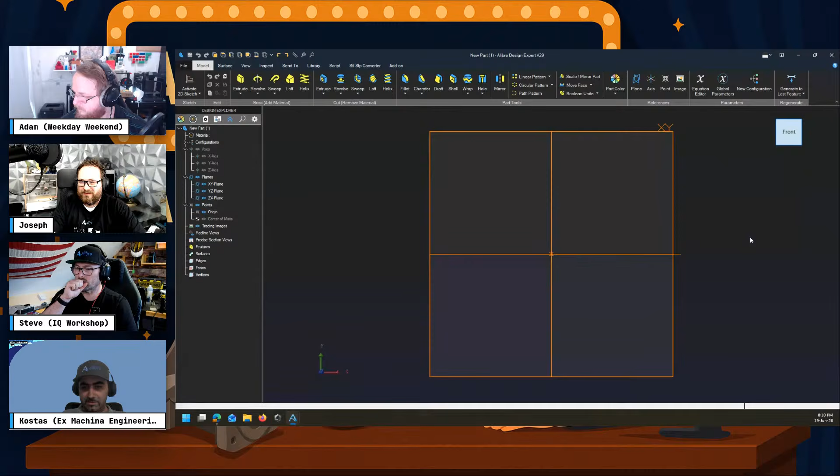But yeah, okay, so let's answer quickly. Yeah, if you need to open up a CSV file into Excel. But if we can switch over to my screen, I can start showing how it works. So what I'll be showing you guys now is the official Excel add-in.

So let's say that we've got a flange here, right, this is the original example. Let's say the outer diameter is 285, and the inner diameter, let's call that 160. These are not real numbers, these are off the top of my head, but you can definitely look up real data and base the design off of that. So this is the flange disk.

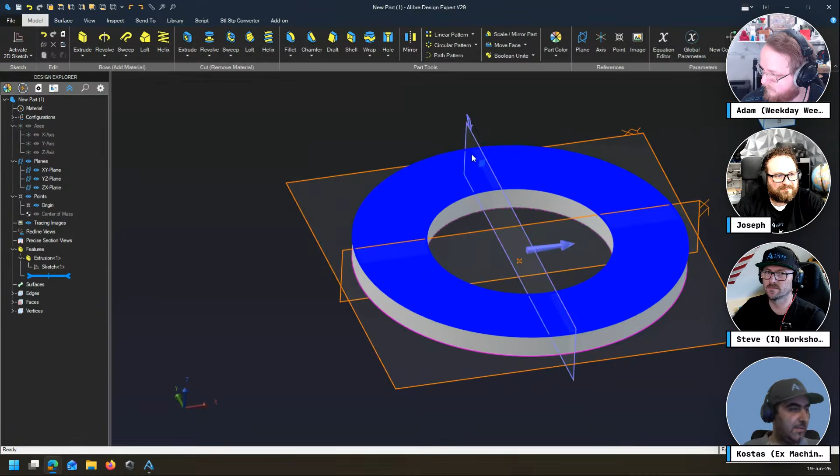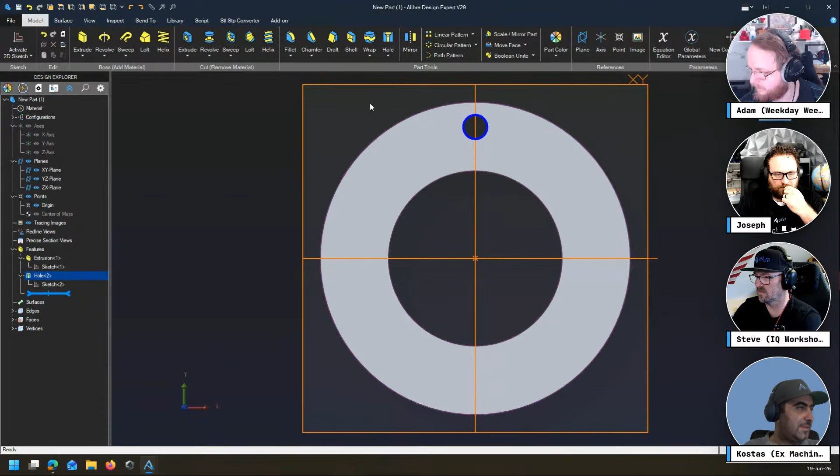Okay, let's go ahead and get a hole going in there. Apologies, I think I have too many presets. First time you open it, it takes a while if you've got a few presets. This is how many I have, by the way. Okay, let's get a radius going here, let's do 120. Is that going to work? Let's see, yeah, that's fine. And I'll pattern this for 8 times.

Okay, so this is a flange, a very basic rudimentary flange. If we go into our equation editor really quickly, you will see that as we're designing, we're creating parameters here. One parameter is a count parameter, number 8, that's the pattern I just did. Then you've got outer diameter, inner diameter, and you can change these names. This is the hole diameter, this is the PCR, circle radius. So this is the flange thickness, this is the hole diameter, this is the radius of the bolt circle.

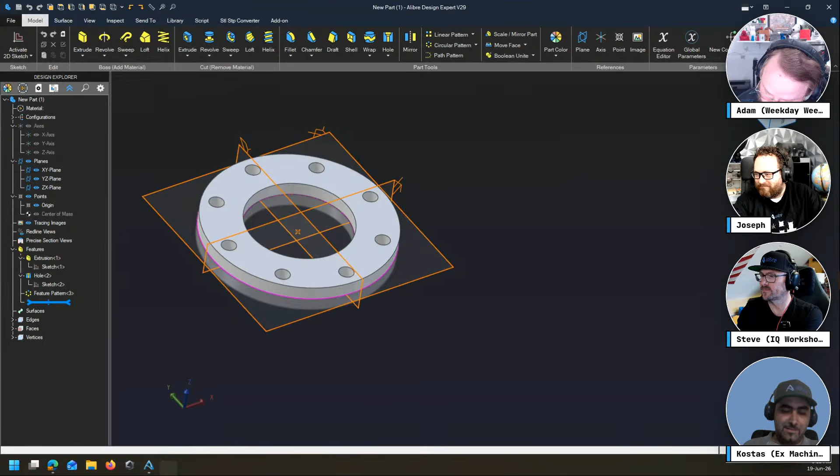So what happens now? Let's just, I need to save this somewhere, I'll do my desktop for now. So what happens now if we fire up Excel? Well, let me do this. There you go. No? Again guys, sorry, technical difficulties, we'll get there.

So what happens here is if you go into add-ins and you need to save this workbook. Okay, let's save this also to my desktop, let's save it to documents, that should work. Yeah, for some reason my Office saves everything into open format first. But anyway, so I guess it knows who the owner is. But as soon as you open up the Alibre Excel add-in, and I show in my video how to install it, it's really easy to get it going.

What you get is this screen, and you have session here, configuration. It can also drive configurations, and this is amazing. If you click here, what you get is this dialog box which shows all of the open files for Alibre that you have going. So you might have part files that are open, you might have an assembly that is open, it'll all show up in here.

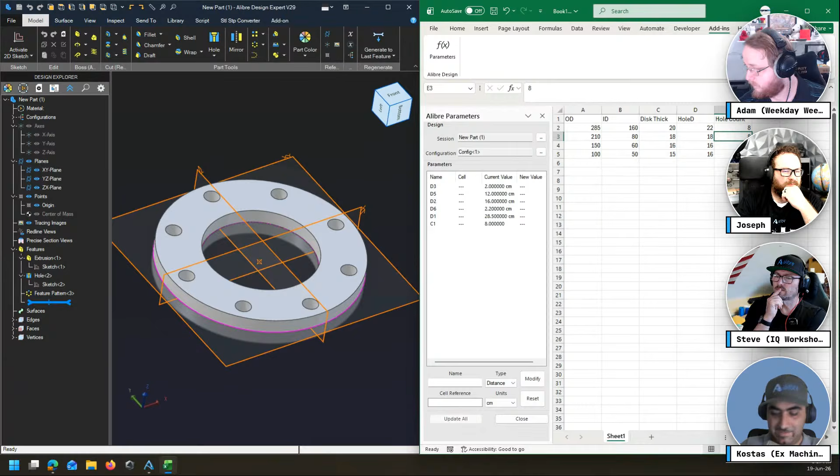Let's still do 16, and, oh, you know what? Let's make this really weird. Okay, let's say that these are the values that we want. This is our table, right? Okay, so this is turning into an Excel tutorial, but bear with me. Let's call this size, and we'll call this A, B, C, and D. So I'm not just showing you how the add-in works. I'm also showing you how to set it up so that it is useful, right?

So we're just going to go here into data and data validation. You go into data validation, you get this dialog, you go list, and you hit this button and you tell it that this is your list, and you hit OK. So what happened? You just made a drop-down menu here. It says A, B, C, and whatever, right?

And now we're going to go and do a quick lookup. This is our lookup value. Comma. This is our table array. And this is going to be column 2. And we're going for exact matches. And that should work. And you see that we got our value here, right? We need to hit F4, so we lock all of these cells into place.

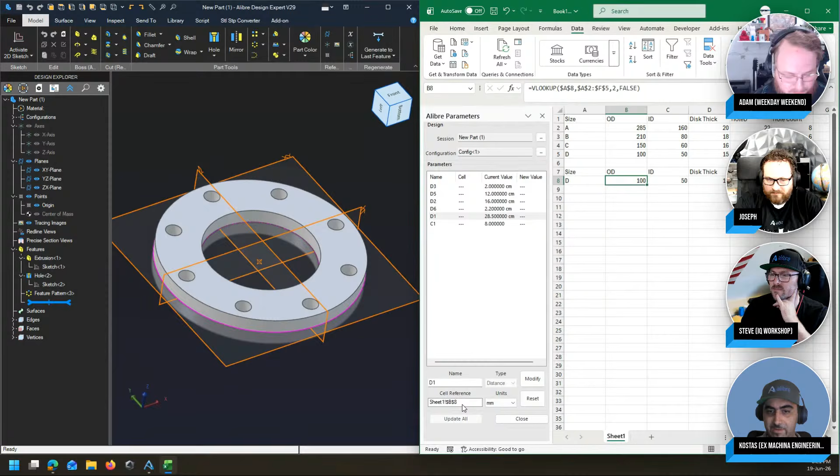Advanced CAD CAM Solutions just said you need to... it's in centimeters, not millimeters. Oh yeah, I was going to highlight it. It's not letting me highlight comments, but yeah. So you have your units down here, right? And you tell it that this cell reference that I just gave you is in millimeters. It just needs to know that, even though it operates in centimeters as it brings it in.

And after I select these two things, I just click modify. So what just happened? First of all, this became millimeters. Okay, that's easy to see. And now there's a cell reference, and the current value is 100 millimeters. We have a column here that says new value, which is blank at the moment. So let's go through real quick and do all of these.

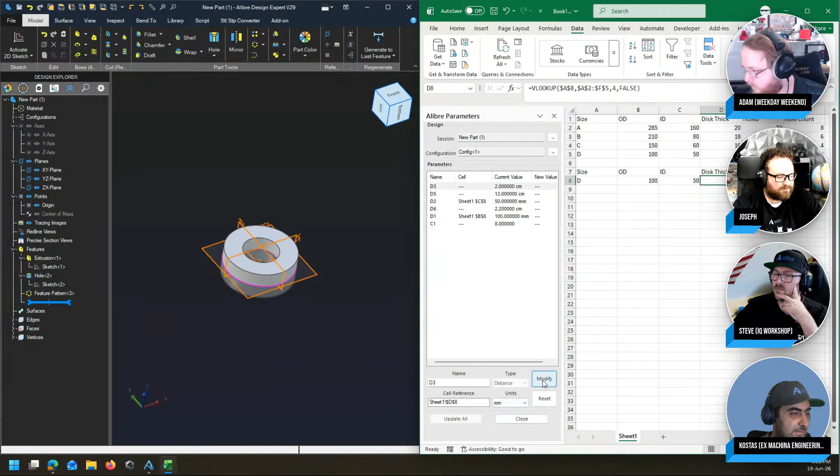It's not going to take a huge amount of time. So this is the disk thickness, and again, it is in millimeters. As you modify things, you still have an overview from this table, just to make sure that you're doing everything correctly. So this, see now we missed. Okay, so I'm just going to insert a column here. Doing it live, right? Bolt circle radius. But that's the beauty of it.

It is easy to work with, which is amazing, isn't it? Let's do this 110 and let's do this 75. Will that work? I don't like this number. I'll make that 90. Okay. And I'm going to go here. And this now needs to be 4. And okay, these values need to change now.

So that's about it. You see how easy it is. I just love how easy it is to work with these things. So this is now the bolt circle, and my reference is this one. Let me just bring the label down as well. Oh, you see now, guys, I didn't hit modify there, so it didn't go in. Now it will go in. Okay, D6. That is the hole diameter, which is this one. Do I have E8? Have I put that in?

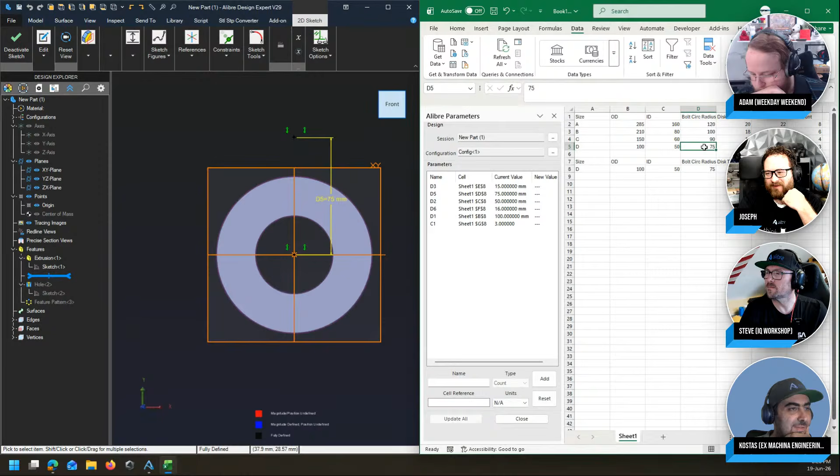So this has updated, which means that I messed up with my hole somewhere, right? Okay, so this 75 doesn't work. We need to rethink that. That's the radius, isn't it? So maybe 75 divided by 2. I guess this works a bit better.

And you see that now that I changed this in the table, the VLOOKUP picked it up, changed it in the driven cells, and the add-in picked it up and is telling me you have a new value there. So I just say update all, and it's in here. I'm inside a sketch, right? It works seamlessly. And if I deactivate my sketch and hit F5, it should go through.

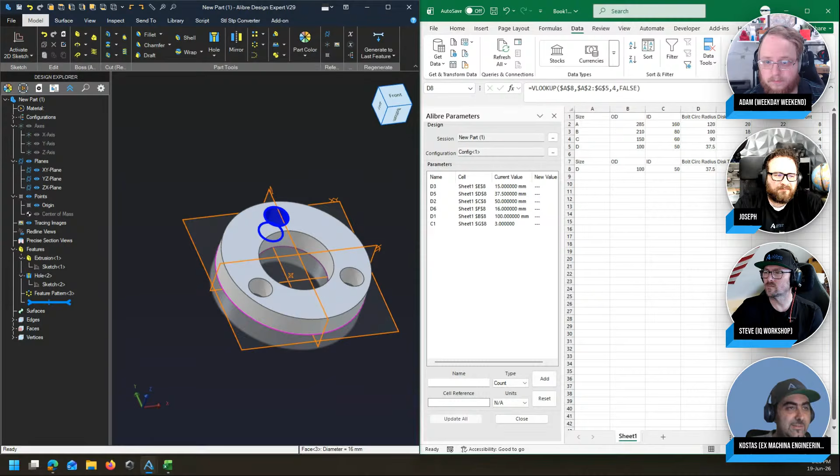And let's check: this diameter is 16 millimeters, right? So let's change this. I don't like it. Change it in the table, the VLOOKUP picks it up, I hit update all, and now it's 12 millimeters. So let's go and build our original one again. Update all. Well, this will take a while. This is what we started with.

Let's see, size B. I think these all need to be divided by 2 or something. Let's do this 80. Let's do this 55. So size B. You see, I'm changing these as I go. Hit update all. This is our size B now. So hole diameter, if I click here, you see down here, size B, hole diameter 18. So what do I have now?

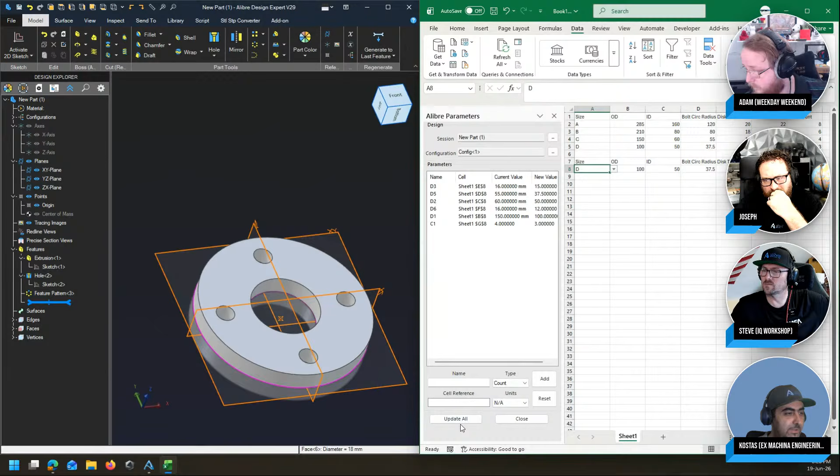I have a part here that will change according to my data. And the beauty is not when you make the data by yourself like I did here. The beauty is when you go online, download a huge table, and clean it up with Power Query or something. Then what you have is all of the parts in that single table as a single part. And this is the mind-blowing part for me. This is why the energy from Crete reached over the Atlantic, and even Joseph felt it. Guys, what I just showed you here is the exact workflow, click for click, in Alibre Atom3D.

This works in Atom 3D, right? You can do that in a $200 CAD system, right? It's mind-boggling. And I just told you at the top of this live stream that I use this capability in SolidWorks, and I made an entire catalog.

By the way, if anyone is interested and is familiar, it was the catalog from Contarini, which is an Italian hydraulics manufacturer, great company. And I made their entire catalog: pistons, cylinders, rods, seals, all of it, right? And that was in SolidWorks Professional, which is not 5 times more expensive than Alibre Design Expert. It's more than 5 times. In Greece, SolidWorks Standard is 5 times more expensive than Design Expert.

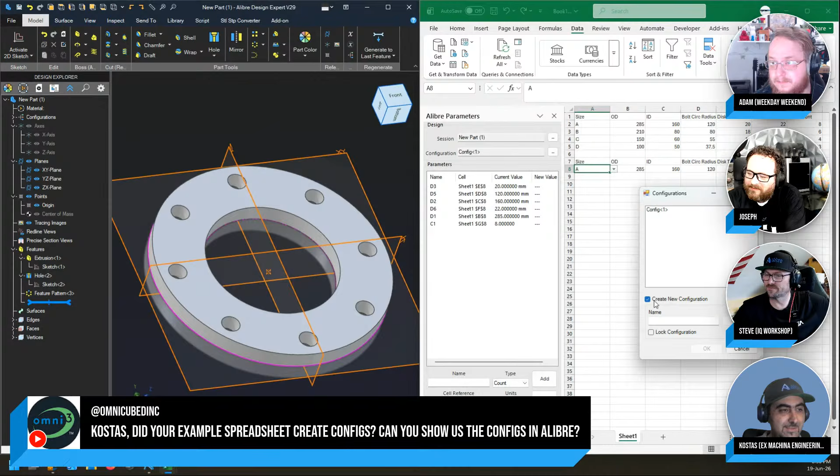We got a pretty good question here. Did your example spreadsheet create configs? It didn't. And why is that? Because I didn't ask it to, right? You see that I can create a new configuration right off the bat here, right? So there you go. There's a proof. It does not create new configurations. That's the beauty of it, and the beauty of this spreadsheet. But I might be hogging the time, and this might be a nice subject for a video, a deep dive.

The beauty is that when you create a new configuration from the Alibre Excel add-in, so let's say that I'm doing new configuration, configuration 2 can drive the same parameters from different cells, right? So right now, D1 is driven by the cell in sheet 1 at position B8, right? There you go. I just clicked on it and it shows me what's what. If I do a configuration, I can have the same parameter driven by a different cell, one down here.

So the combinations are amazing. I mean, seriously now, your imagination is the actual limit at this point to what you can do. And you can drive different configurations. So what did I do now? I took every single parameter in the file and I drove it from this spreadsheet. But what I could also do is drive half of these parameters from this Excel spreadsheet, and drive the other half from a different Excel spreadsheet, right?

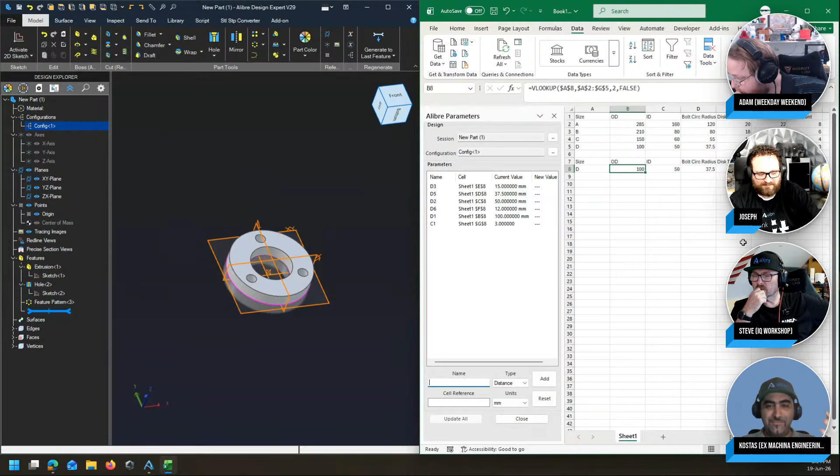And just to blow your minds even more, guys, this works in Atom 3D, as we said, but this can also drive global parameter files, right? Not just 3D models of parts and assemblies. You can actually drive the global parameters, which has its own layer of configurations. So the actual level of complexity management you can do with this little tool that is given to us by Alibre for free, basically, and included even in Atom 3D.

There's a lot of questions here. This is kind of just a really broad view of it. Kostas has a couple different videos that explain this whole thing way more in depth, as well as there's always the forum if there's something specific that you're wanting to do.

This is a good one here. Imagine the part needs a complex drawing that I don't want to make 10 times over. Exactly. How does a save as workflow work that includes the drawing and allows multiple parts referencing the same table?

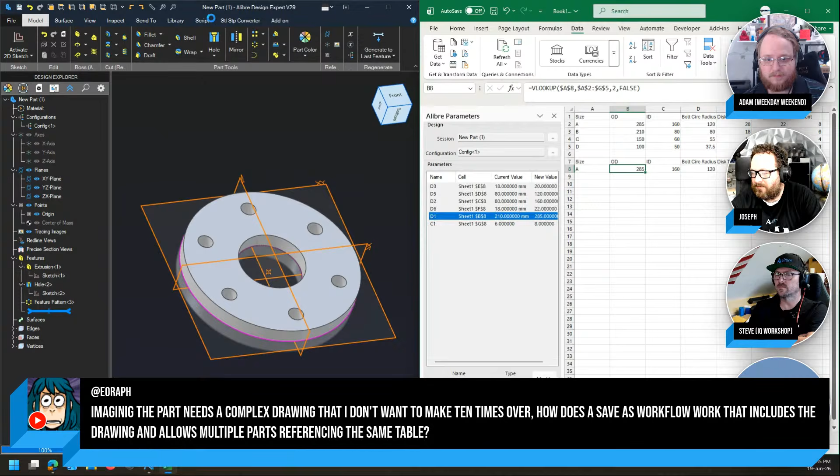That's a great question. Oh yeah, sorry. Let me tell you. It's as simple as this, right? So let's say that in one assembly I need size A. So this is my generator part, right? Let's consider this to be a generator part, and then I go and hit save as, right?

My computer is slowing down for some reason.

Okay, so I'll call this size A, right? And now I have size A as a separate part file, right? And I can go in, bring it into my assembly. Now, 3 days later, I make a different pipeline, let's say, that requires size D.

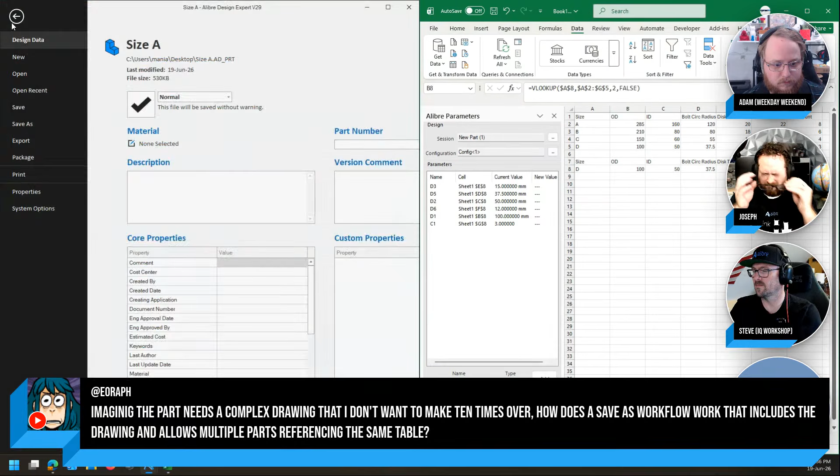I open up my generator part, I make my size D, and then I go and save as this file, and I will save this. And you can see this is size A, right? It's already created. And I will just save this as size D.

So basically what I've done here, right? And the way I propose to you guys that you use this is you can make a library of generator parts, right? So there is a caveat to that, though. And let me just show you what it is, right? Let's close this. Let's go to size A.

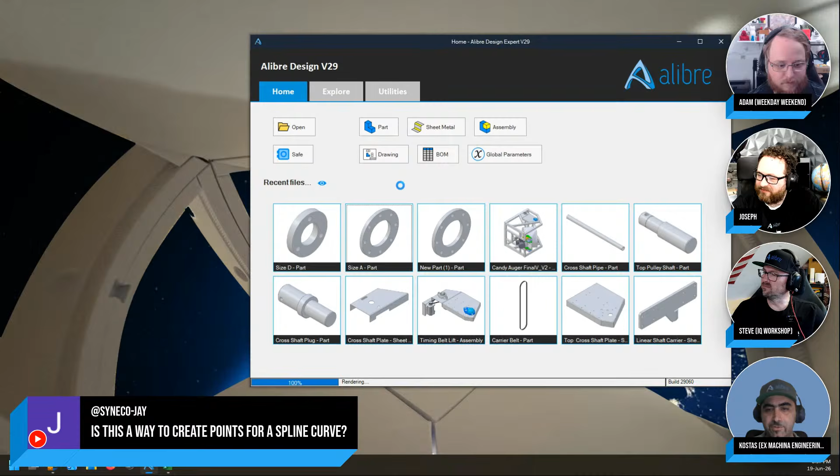And while we're waiting, I see a pretty compelling question. Is this a way to create points for a spline curve? And of course. Yep, there are a few things behind that too. So don't let me forget to talk to that as well.

Yeah, sure. So if I go into my equation editor, right, you will just get this message saying missing external reference. One or more externally driven parameters have a missing source spreadsheet file, right?

Are you sharing that, Kostas? Because we've got the Alibre launcher. Oh, I didn't. Oh, I'm sorry. Let me do that again. That's okay. I didn't. It opened up in my second screen. Doing it live. Doing it live.

And I also see this question. Can this be extended to the sheet metal? Guys, if it opens up in Alibre, it can be driven by an Excel spreadsheet. So sheet metal, whatever. It's sky's the limit, basically, right?

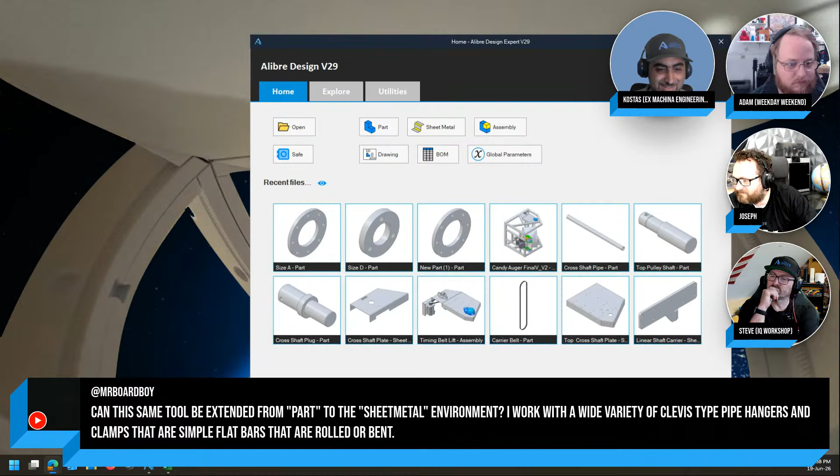Okay, so let me bring that in. So I click on my equation editor here, and I get this error message. One or more externally driven parameters have a missing source spreadsheet file. So basically, what it's telling me, and you see the source here, right? It says X. Okay. So if I change this, can I change this? So yeah, I cannot change that.

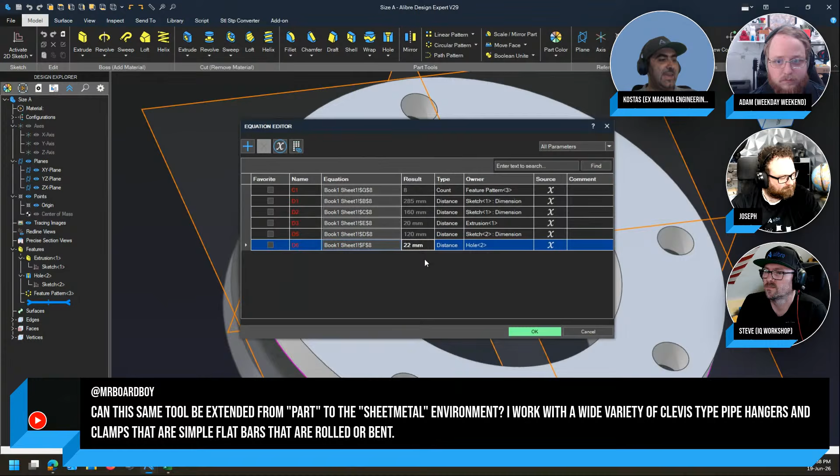So the idea here is that this part now, right, exists as is. You can add things to it, right? For example, what can I do? Okay, oh man, this is really slow. Having a keyway cutaway that doesn't make real sense for a pipe flange, but you know, let's just pretend that it does.

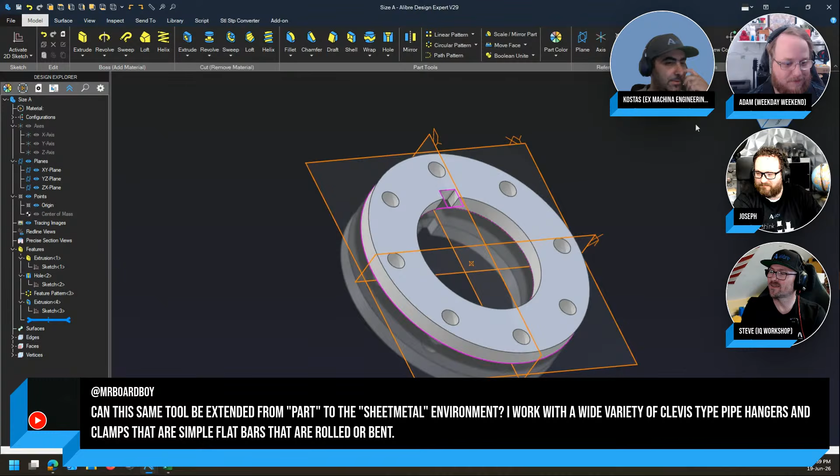So now you can add things to it, right? I'm getting that message again. You can add things to it, but you see that the other values are basically kind of locked. So you will consider these files, you know, like starting files, right? You get your file, it works, it calculates, it's usable in an assembly, but in order to break the connection between the spreadsheet and this file, you basically need to make new parameters and go in one by one in every place that they are used and reassign them.

So yeah, the way you treat these parts are as generated dumb parts, because they're now locked like this, but you can then add things to it, right? So yeah, that's the general outlook of it.

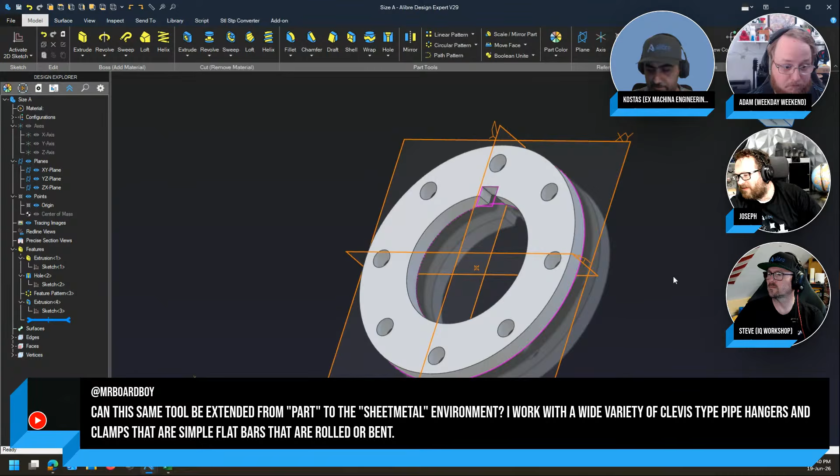Any other questions? We still have the highlighted comment here that yeah, it can definitely be extended to the sheet metal. Yep. And you might want to check your noise filtering, but I think we have some background here.

I also see a question: do you always have to use the generator part workflow and save new files, or can the spreadsheet create configurations in the same file? Thanks for that, Joseph. Yep. So for a second, it looked like you could tell it to generate configurations. So I'll let you take that one, Kostas. Can you generate configurations from the Excel add-on is the question.

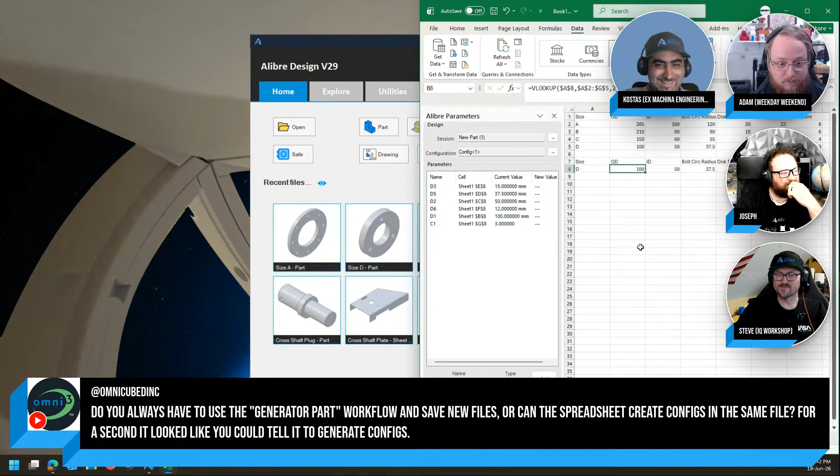You can. And I'll be completely honest, I've never done it, but if you would like to see me fail live, we're gonna pull the lever. Oh yeah. I mean, I always say that when you're making a YouTube video to educate people, you need to be brave enough to fail on screen. I don't always do that. I'm not always that brave, but yeah, let's fail on screen right now.

So this is our generator part. Just to answer the first part of this question, no, you do not always need to use the generator part workflow, because you might design a part that you want to go in an assembly and it needs to exist only in that one assembly, right? You don't need to make copies of it. It just needs to exist in that one assembly. Or you can drive the entire assembly off of it, right? So in that case, you don't use the generator part. Your part is your actual part.

But in a case like this, when you're making a flange, which, let's be honest, in a single pipeline you might use dozens of these or even hundreds, right? Well, in parts like this, it pays to use the generator part workflow. But if you're just making an assembly and you want this part and the timing pulley. So my other video is a great example. A shaft, a key on that shaft with its key slot and whatnot, and the pulley are all driven by the same Excel file. So in that case, it's not a generator part workflow.

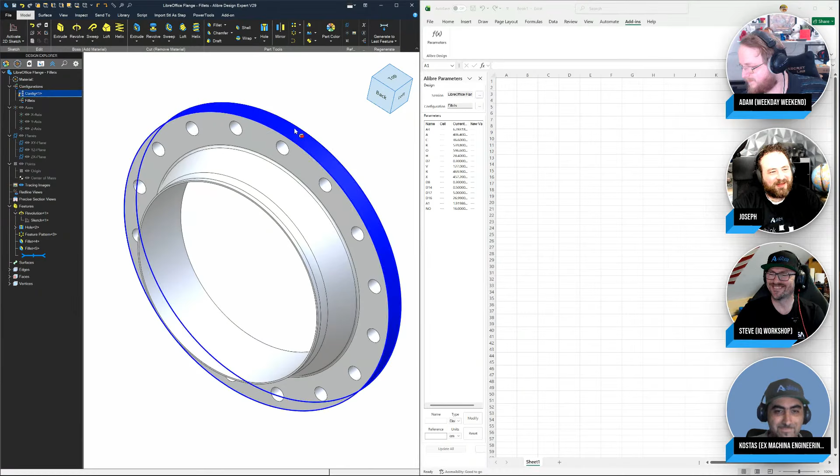Go ahead, Joseph. Sorry, if you don't mind me cutting in here, I can switch here. So obviously I have this flange with two fillets. I'm trying to be cool like Kostas because he put out this awesome video about weld neck flanges, and you can choose configurations, but if you click these three dots, you can just click a box here that says create new configuration, and I can say new config. We can lock it if we want to. Click create, and then I got this new config there.

So useful, handy. And as Kostas was saying, I think Kostas is the real master at Excel here, because everything is so well thought out. So, but yeah, kind of a cool nugget there. Yeah. So that's what I was about to do here. Oh, sorry, did I steal it? Sorry about that. No. Don't worry about it.

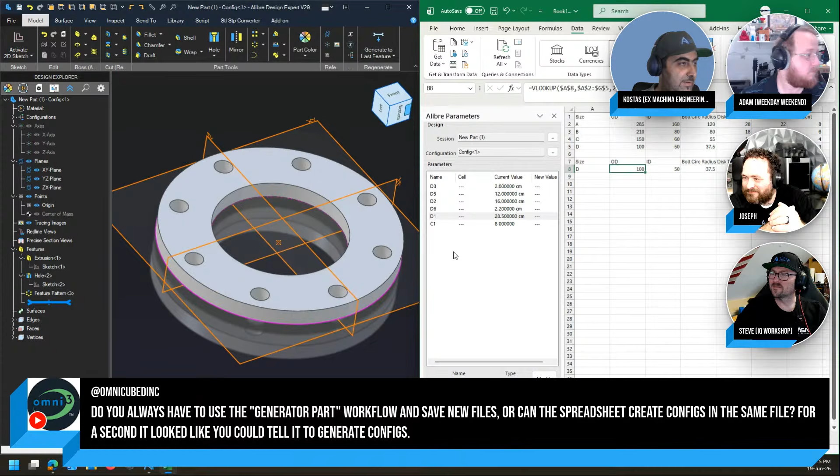So let's call this config about to fail, because why not? And let's hit create, and I'll hit OK. So where are we now? Okay. I didn't save this file. Okay, so this is okay. And I've done this mistake with the Excel add-in before. It's not the first time I do it. After you link your Excel file, you need to save both the Excel file and your part file, or else you didn't link anything. Okay? So that was a nice one. So this is all unlinked again.

Yeah, if you want to bear with me while I do that again, or maybe... So I got a point to make here. Go, Steve. Go. Is it fair to say that not all use cases are equal? So you've got somebody who, of course, is creating, if you want, seed parts. So you've got someone who's creating flanges, pulleys, gears. But then you've got somebody in a different use case that would be creating assemblies and driving parts. So what you're demonstrating here is a framework that has the flexibility to do all of these different things, not just one. So it's about the viewers that are here with us today looking at their own use cases and seeing how they can apply this framework to it.

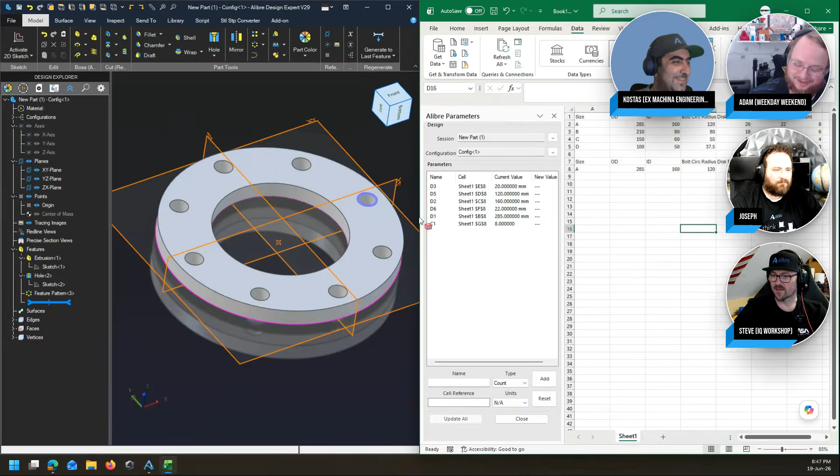On top of that, please remember the forum. If you have something that's on the tip of your tongue, you're like, I know that's got to be possible, right? I've got to be able to use this add-on for what I'm trying to do, and you're not quite sure how to do it. Check the forum, because the people on the forum are absolute masterminds, and more than likely you might even get Kostas, because this is like his favorite feature, saying, "Hey, this is how you do it." Oh yeah. For sure, guys, for sure.

And I don't know if you saw that, but as soon as I updated the file, the new configuration got created. Did you see that? Did you catch that? Can you see that, guys? I have a new configuration in here, and it is called config about to fail, right?

And I can edit it like I edit any configuration. Right now it can change any of these things, but I can lock it so that it changes only certain areas. And I can just click here again, but for some reason this is really heavy. I'm guessing the stream doesn't like it.

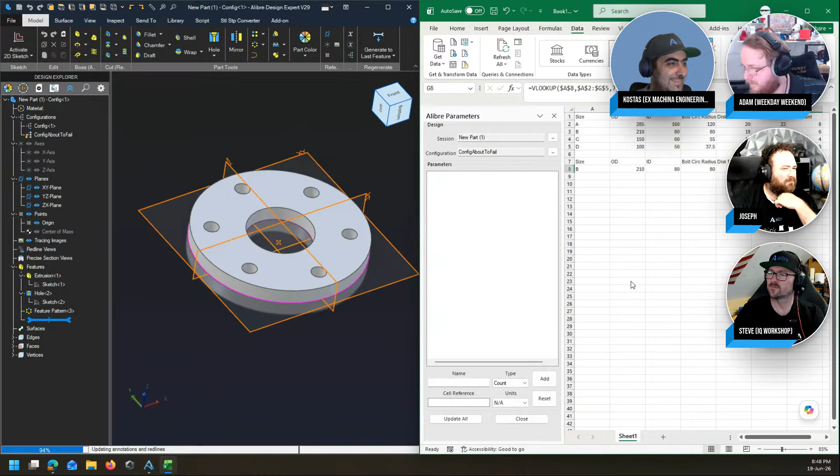Okay, so now I changed my configuration, right? You see this, I changed my configuration, and now I can be doing different values, right? Let's just say that I need a different line, but let's say that this config is always this second line. That didn't work. Instead of 8, let's do 6. Okay, let's modify that. Right, and update all.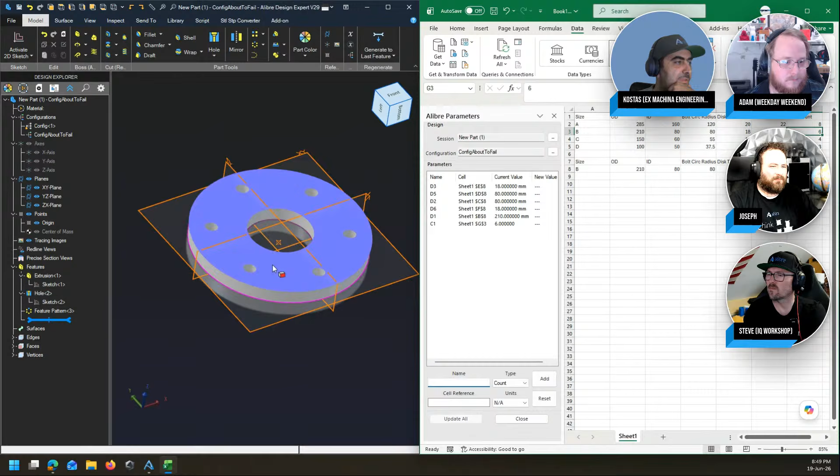Okay, so this now is one part, and my other config. Okay, so these are locked together. It's a bit hard to explain how configurations work on the fly here. There is a lot to discuss on configurations. Maybe that's a great video to do in the future. But yeah, you can also create configurations right from the Excel spreadsheet, and they will propagate into the actual part, and you can manipulate them and do what you want with them.

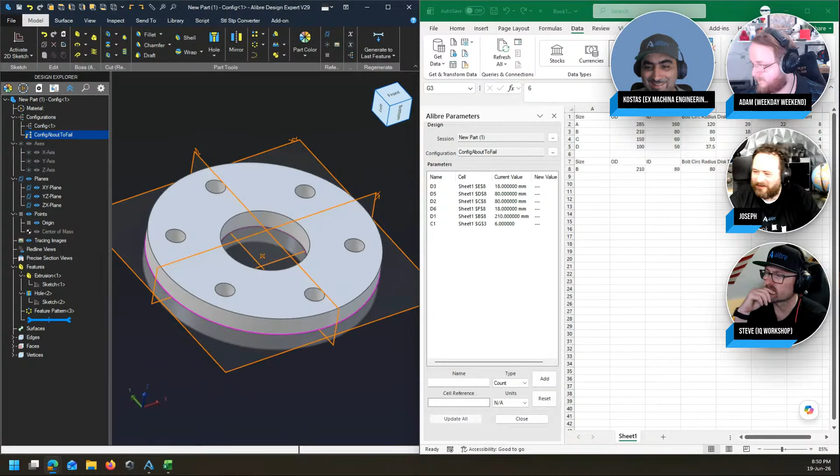Well, maybe it's time for - go ahead, any other questions? Just to close the circle on Omnicube's question, yeah, you can tell it to generate configs. No, you don't always need the generator part workflow.

That's it. Fantastic. Well, thank you for taking us through that, Kostas. Sorry, Joseph. Oh man,

Let me show this, right? Can you use text in Excel to drive a text element in Alibre? The answer to that is no, unless you are a complete madman like me. So

I do mention this briefly in my video, in my latest video on the Excel add-in. I have another video on how to do a dynamic serial number, right? Where I create a sort of what was that called, not a codex, is it a cryptex where you need to change the numbers, like in the Da Vinci Code, right? That device - so you roll some - oh man, I don't know how to explain it. Go check his video, you'll roll - check my video, right?

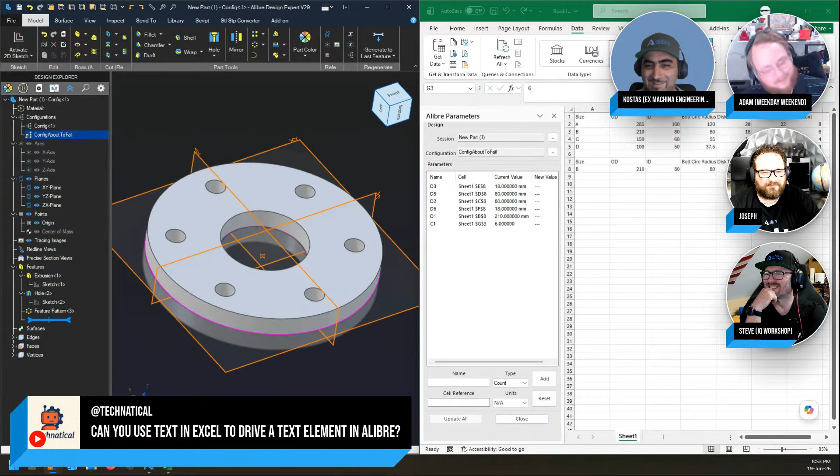But if you want to do something like that, that's the way to do it. And maybe I even make another one of those videos that bomb hard, and I make a dynamic text. Who knows? Sorry for that, Joseph. Yeah, you can go ahead.

Oh, absolutely. Well, thanks so much, Kostas. It's great to get all of your Excel skills going here. Now, we did get this interesting question about, can you use it to drive splines? And yes, you certainly can.

That's a good one, because what the add-on does is it takes information from Excel and it puts it right into equations. You can use those equations to drive splines. The important thing is you can update the spline curve as you change your data in Excel.

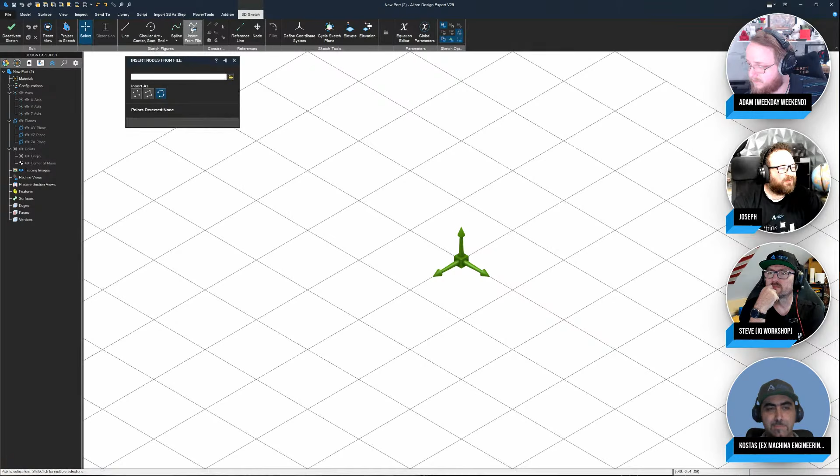But if you're looking to just do a spline curve, I think something that's more preferable is to insert spline from a CSV file, right? So I can click my little folder and I'm going to pull up a coordinate file, spline coordinates.csv. This is a very loose example, but we can just import these and it builds a spline in 3D or in 2D. We have this in both 2D and 3D, where you can just put a bunch of points down, connect them with a spline, call it good. A lot easier than creating the points and dimensions and trying to work it out with all of your equations. So if you need updates, use the Excel add-on.

If you don't need updates, I think this CSV is a really handy tool.

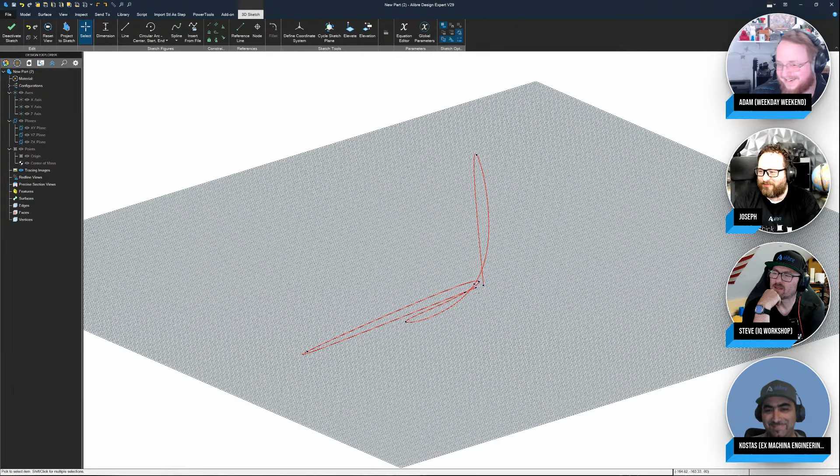Could you then create weldments using the Excel add-on in the same way you'd be doing spline? Weldments isn't out yet, but I don't see any reason why you couldn't have some Excel-driven weldments. Soon.

Imagine you use weldments to make a 3D printer frame, then tie that to Excel, and then you have 50 different 3D printers that you change by clicking on a drop-down menu. Same with CNC machines and entire machines. This is amazing, isn't it, guys?

This goes deep, doesn't it? Yeah, that is going to be crazy. And the funny thing is, I'm nerding out over this, and I personally don't even see a use case for it for me. It's one of those things where this is freaking amazing. How are you going to use it? I don't know, but it's amazing. Who cares, it's amazing.

I've got a use case for it. If you want to design your own gears that are particularly difficult to manufacture, like a herringbone gear, you could pattern that out in Excel, so Excel drives it. If you need a gear of a different diameter, tooth count, etc., you just punch in the details. You haven't got to go through the hassle of remodeling it over and over because it's Excel-driven.

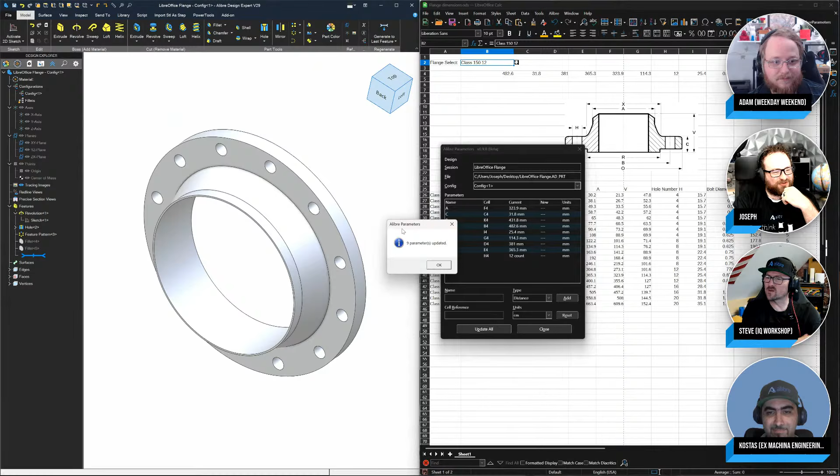Now, my favorite thing of this whole thing - I hate clicking through boxes, and this box, after we update and it tells us, it just dismisses itself. It's heaven to my eyes that things get rid of themselves, but maybe that's a small point. So we are able to associate these things. Furthermore, we have the ability to switch the active configuration of our part from LibreOffice. Here I have a fillet configuration. I can switch back, and the part auto-updates pretty much instantly. Man, that's so cool.

Isn't it great? It is great. It's so cool. I can open up another part here. Oh, weekday, weekend part. Shout out to Adam.

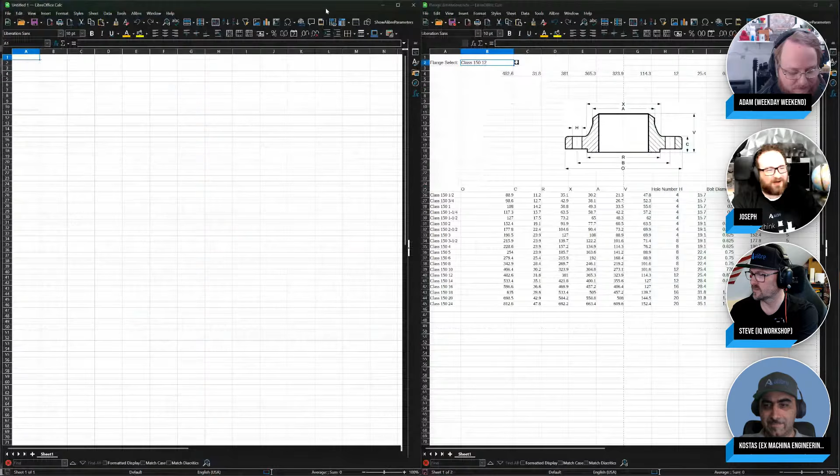But we'll pull up this wheel. This just takes a quick second to rebuild. I'm going to start a new spreadsheet here from LibreOffice, and we'll tile that over here. So when I go to show Alibre parameters, I now have two files open, and they both have named parameters. So the question is, which one do we pull from?

Once again, I'm having the same thing as Kostas. It takes a little longer when you're live streaming, so thank you for bearing with me.

This is usually a pretty quick update here. When I go to show Alibre parameters, let's see what happens. Yes, it scans both of my open documents, and I can choose which one I would like to show the parameters of. So even though this is rebuilding, we can still import some of these parameters.

So I can say maybe add a parameter here, and currently we have a count of 5, so I'll make a count of 6, getting some new parameters going. Maybe we'll say width and make that 24. So when we want to associate that with a cell in this, we just say number to pattern, and we want to make a cell reference there, it looks like C11.

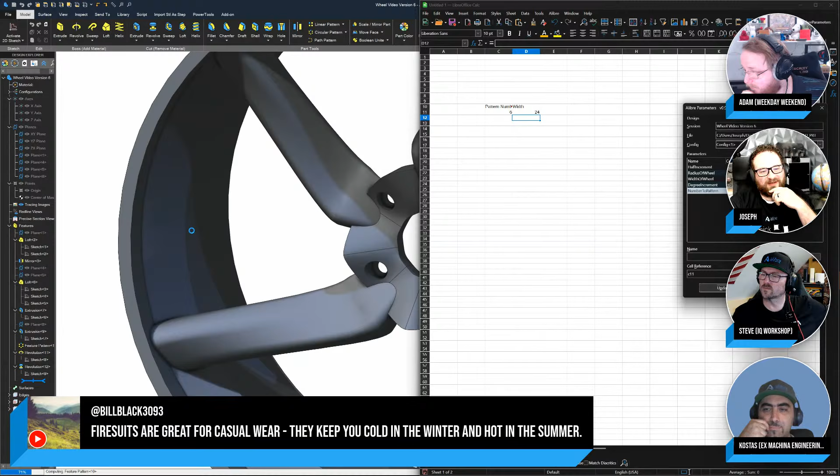It's still loading over here, so we're not going to see any fireworks, but it looks like we're almost done. It's pretty simple, right? We just type in the cell references that we want, with the different configurations, and it's all going to be there. So one parameter was added, and it's already updated in our wheel. Once again, I can adjust the width, and our cell for that, of course, is D11.

Can you nudge that parameter box over? It's sitting behind you right now. I'm sure everybody would rather be looking at my pretty face, Steve, but if you insist.

So once again, we can just, and I did something, with the wheel. For our viewers at home, is this something that's available now or available soon? Maybe the units, Joseph, are in centimeters. I think you're right, it does automatically do the units on the fly, but yes, that is a big question: when is this going to be available?

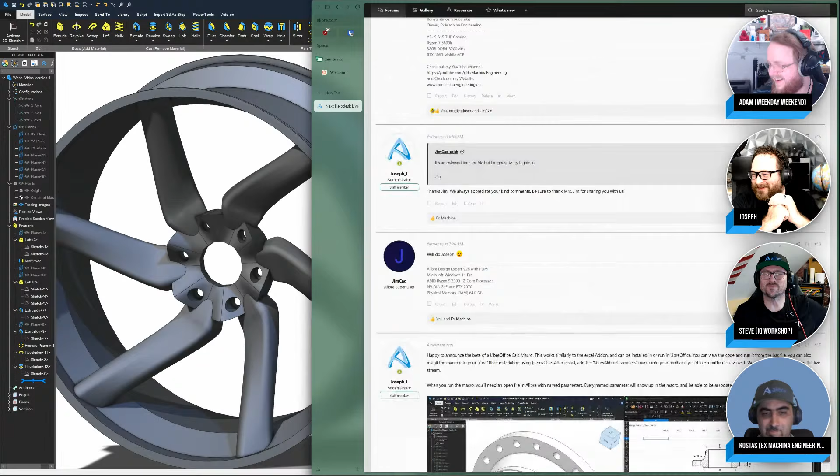So this is super cool, right? Because Microsoft Office is a subscription. It's nowhere near as ridiculous as Fusion, but it is a subscription. Currently, for me, it's like 11 euros or something, but I do have Microsoft Access as well and an enterprise account for Teams, so maybe that's why it's a bit more expensive. But yeah, it is a subscription. And this is just taking all of that horsepower we just showed and bringing it to LibreOffice Calc, which is free. That's so absolutely cool.

So cool, man. That should be a pretty good overview as to what we're looking at. You cannot create configurations in this, but I think that's coming soon. This is a beta, it's not fully released yet, so take that into account. We'd love to see how it works for all of you guys, but this should be a really cool and really fun thing to work with.

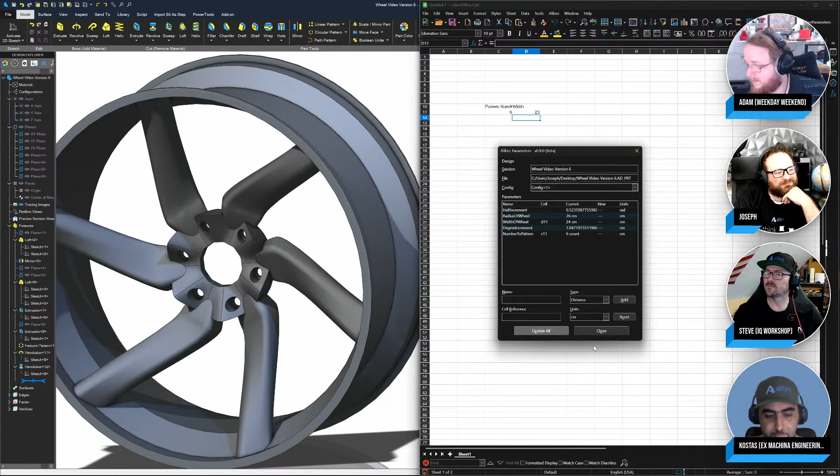Yeah, basically go and break it so that we can get it all worked out. Exactly, and of course, let's do some beta testing on it. That's pretty cool. I've done this offline flawlessly, but I'm running into something here because it's live, and there's probably some screen recording thing throwing something off. But yep, so as usual.

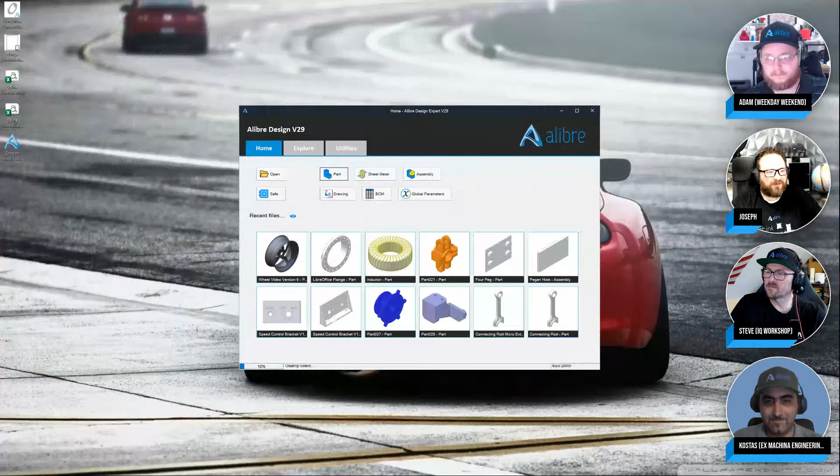Yep, and I don't know if we've ever showed it, but I can go ahead and switch to my screen here. Just loading up a part file. Things go way slow sometimes when we stream, but if I go to this one, I can choose an STL file. Bogged down for some reason. I'm going to loosen up the tolerance here. Hopefully that'll increase processing. When I click convert, we get options. I'll make this heal and make tolerant my first pass. And we'll see how long this takes, but looks like we're going pretty fast.

Yep, so we get a nice imported file. It looks like it's a bit broken there, but if I tighten the parameters and change some of my import settings, then we can get more of a complete body. But it does work amazingly well. I think we're live, and so it kind of is broken here.

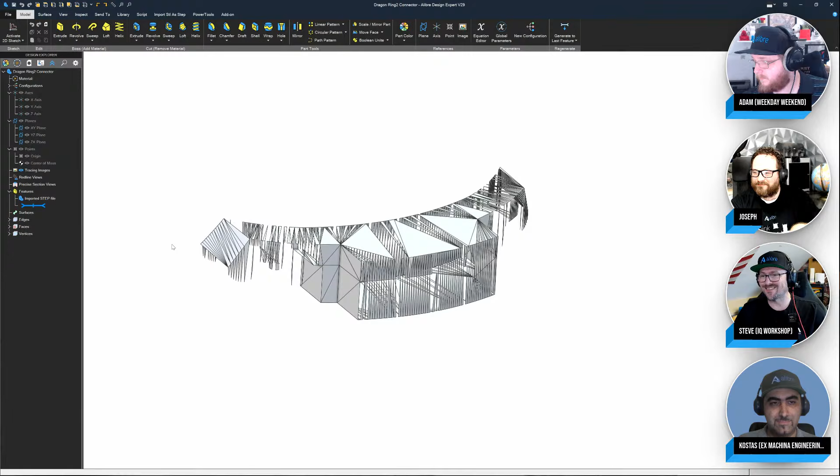Even though it's broken, I think this really demonstrates well that when you bring an STL file into any CAD program, it's a series of triangles, right? There's no curved surfaces. I wouldn't like to think what the vertex count is on that. It's in the millions. It can very easily get into the millions, right? Exactly. Oh yeah, that's cool.

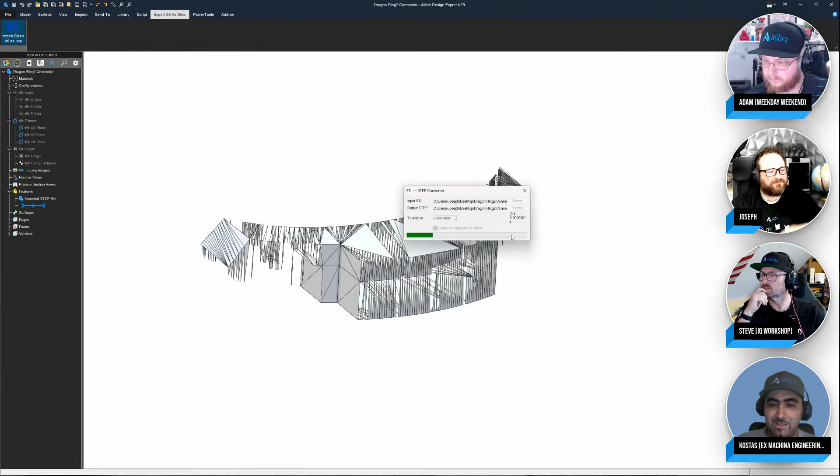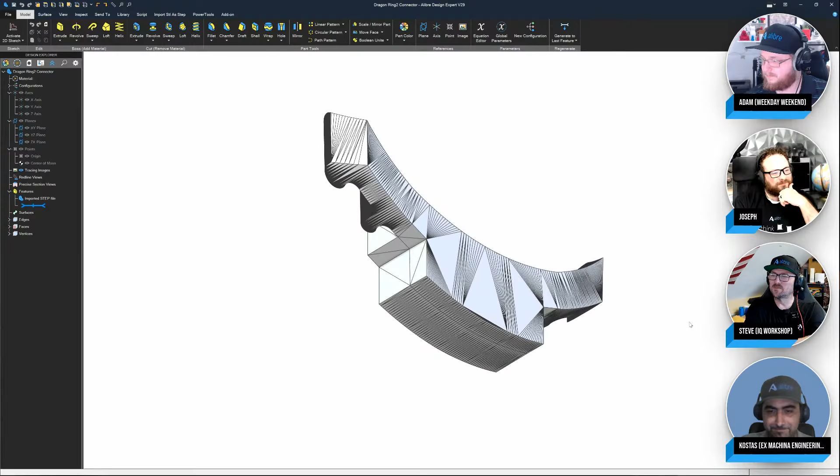So a few years back, I had a client who we were designing something. I don't want to give out too much detail. And he said, well, I'll design that mount myself and I'll send it to you in an STL. Is that okay? And I'm like, well, I'd prefer if it was another format, and I kid you not, he designed it in Tinkercad. And he sent me an STL, and it came out like a few million triangles and a few hundred million vertices, and it was a mount that was 30 millimeters tall with a base of 15 by 15 or something, right?

Yeah, and that's more what we're looking at here, right? So you can get something that you can measure off of or edit or something like that. So it's a wonderful program.

Yep, it's a great add-in, and just to remind everybody, we've mentioned this many times in these lives, with STL you lose a lot of information, right? STLs cannot represent a circle. They break it down into a series of straight lines because they need to reproduce it by triangles. So just bear in mind that if you're at an STL level, you've already lost a lot of information.

And if you bring it into a STEP file, it will come into Alibre faceted, exactly like the STL file. So it might be unusable. On that, if you're someone that likes to do 3D printing, remember that Orca Slicer will allow you to import a STEP file. You can drag a STEP file directly into Orca Slicer and print it just like an STL. So if you're using CAD to make your 3D printing objects, just keep it as a STEP file. Absolutely.

This is interesting. Is there a drivable surface element similar to a spline? Currently, I'm thinking no on that, and I think you mean spreadsheet drivable. But you could probably drive splines and create a surface. I would argue that. So how do you create the surface in Alibre?

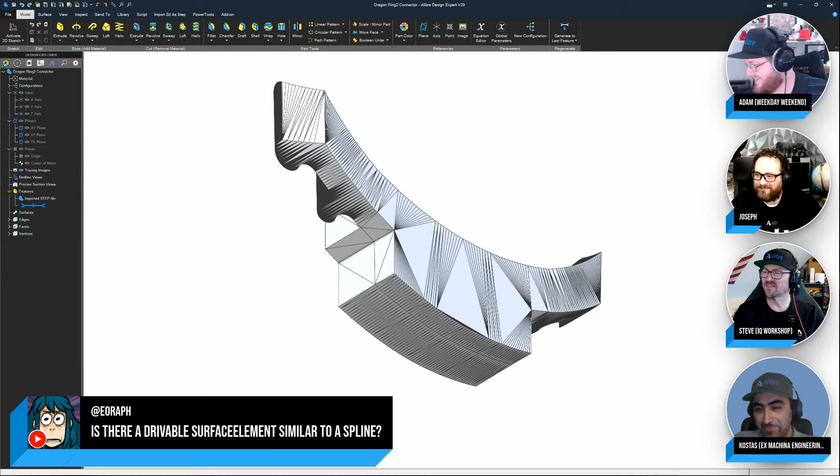So yes, I see. I have a suggestion about licensing. For those with perpetual licenses, you should offer version upgrade pricing, 20% of full price, for example, and this would save individuals some money if we don't need maintenance. Yeah, exactly. That's how it works. You pay about 20% of the original price, and you get 1 year of maintenance during which you can download the new version. It's not 20% for all 3 tiers, but it's there or thereabouts.

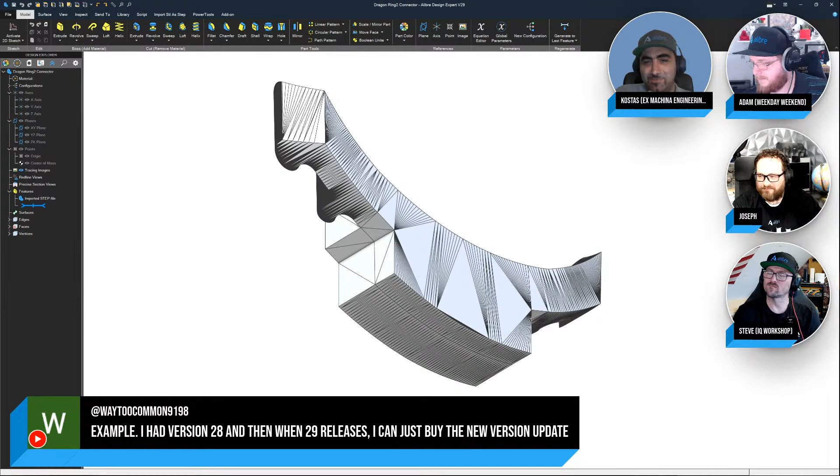Yep. And keep in mind that Alibre is like the only CAD software where you can skip 5 years and then pay your maintenance, and you don't have to pay the missed years in between. Exactly. It's the only CAD software that is remotely logical in that respect. You don't pay the missed years. When they make you pay the years you missed, you never really owned it, right? You were just skipping on rent. It's still rented software. That's a very bad business practice. Alibre doesn't do it anyway.

I'm going to go to this most recent one: can you drive assemblies with Excel for adding, subtracting parts or quantities for arrays, etc.? I would say probably. You could do it because you can drive configurations, right? Of course, you just saw me in this example drive the quantity of a pattern. So yeah, definitely. What you cannot do with the Excel add-in is suppress features or parts.

Okay. Now, for feature suppression through the Excel add-in, I do have workarounds, which I'm already using, because I am in the finishing stages of a very large project that I will make available to the general public for a very low and modest fee. And it's all driven through the Excel add-in. And in that, I have a methodology developed where I actually suppress features based on parameters in the Excel add-in. But it doesn't do it directly. You cannot switch a value to suppressed, for example.

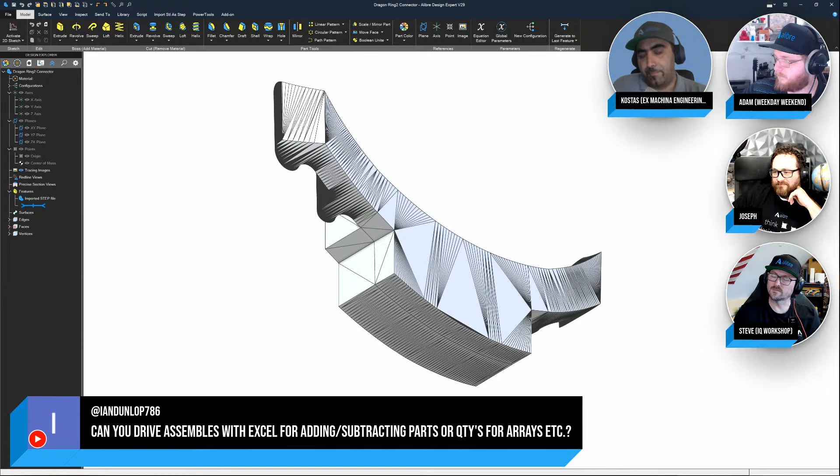That's a great question. If you can drive it in Alibre with a variable from the equation editor, then you can use the Excel add-in for that. Probably a pretty straightforward way of thinking about it. That's a great way to think about it. Joseph just hit the nail on the head. Think that with the Excel add-in, you're driving the equation editor. That is what you're doing. Yep. If you think about it like that, and that you have configuration capabilities, that's a great way to think about it. And of course, in global parameters, you just drive the parameters directly.

Fair enough. Any other questions?

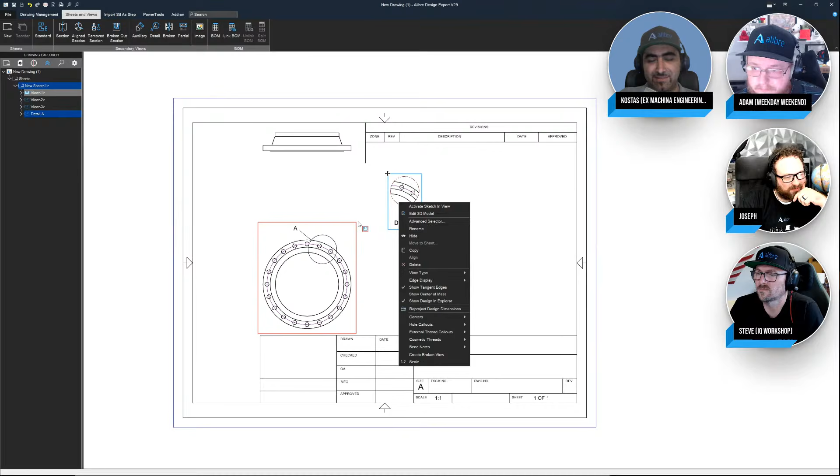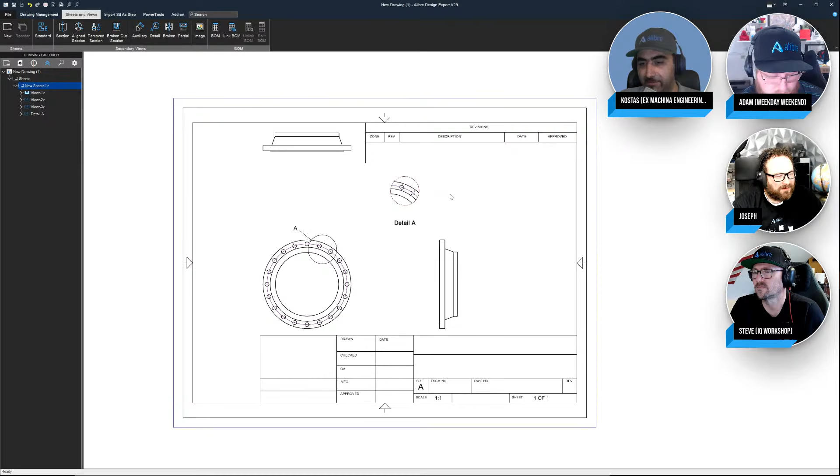The question was, is there an automatic way to do it? You can always sketch on the sheet and use little line helpers to line things up, but I think that's not something for now, at least. Make a future request. But then again, with what are you aligning? Because the detail is like in that flange you have there, Joseph. The center axis of that flange is not even in the detail view, right? It's outside the detail view, so it's a bit tricky.

Mr. Board Boy says, I usually draw grid lines on the sheet and drag and drop. Grid lines on the sheet is actually in the ISO standard, and there need to be very small gray dotted lines that divide the sheet up in sections with letters and numbers for the two different directions.

Sounds like you need some rulers or guides that you can drag into the drawing and snap to. It helps a lot, especially in a very large drawing of an assembly. Let's say you've got an A1 piece of paper with an assembly and you're discussing with a client over the phone. You can tell them, look at the drawing at section F8, and they know where to look on that piece of paper, which is not trivial when it's really huge.

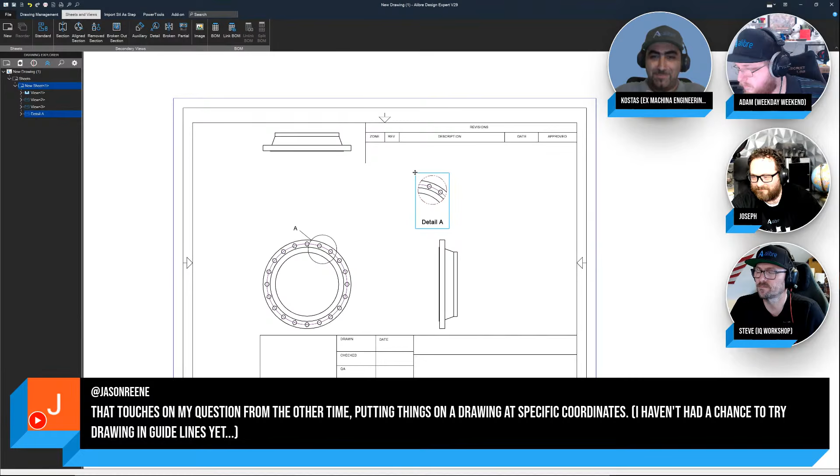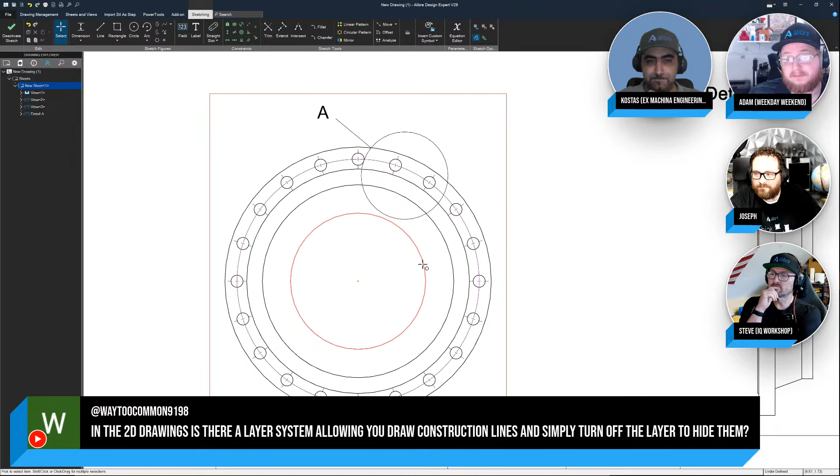This is a good update here: align with center of detail, circle, or other shape. So it would be kind of the bounding box of the view. Definitely, that's a great feature request, and make sure to also mention that you want to align it by the bounding box of the detail view as it is created. That's just good practice when doing any kind of feature request. Also mention why you want that feature and what you're looking to do with it. That really helps the dev team when considering which features to add.

This is a great question: in the 2D drawings, is there a layer system allowing you to draw construction lines and simply turn off the layer to hide them? Yes, that is so important, because when you want to have those invisible aligning things with sketch elements, or add your own sketch elements.

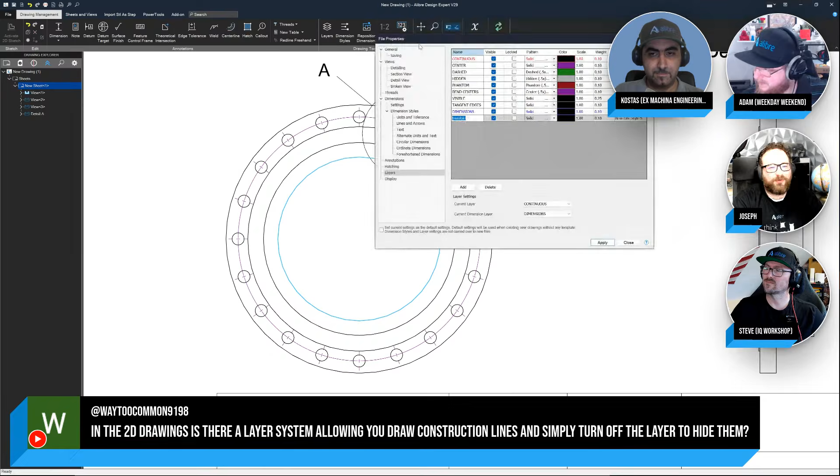So here I've made a circle, and I have layers right here up top. I can, with the circle highlighted, create a new layer. I can add a layer and call it, maybe, invisible. I love having an invisible layer. You can click on Add, and add a new layer. I've created this layer called Invisible, and apply that.

So when I say Set Layer, we choose Invisible over here. And then when I go to my layers, I can just turn the visibility off, and it's gone. I can turn the visibility back on, and it's there. If I want a certain dot style, we have ISO and all these different dot styles, and make it dotted if we want. So a lot of cool things you can do with layers and colors and stuff.

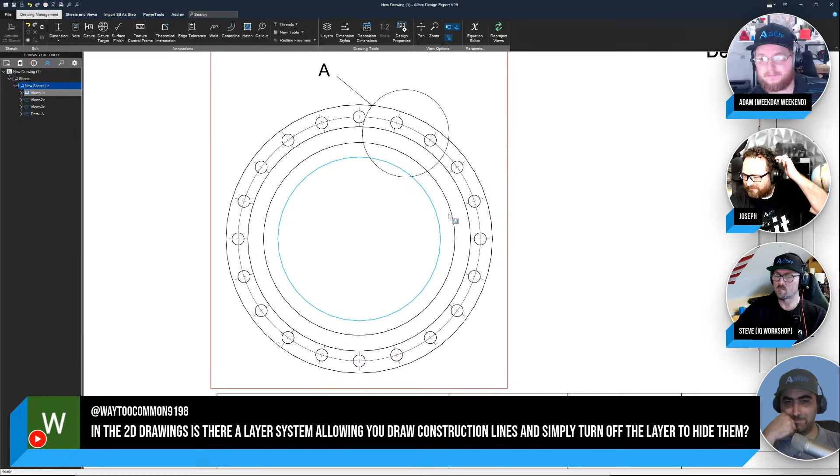And it looks like we've got a response. Excellent, thank you sir, excellent question yourself. Yep, boggling my head when I see that.

When I first started using Alibre seriously for jobs and stuff, I was amazed at the depth, especially of the drawing environment. And then you kind of have to remind yourself that, guys, this is one of the oldest CAD systems out there.

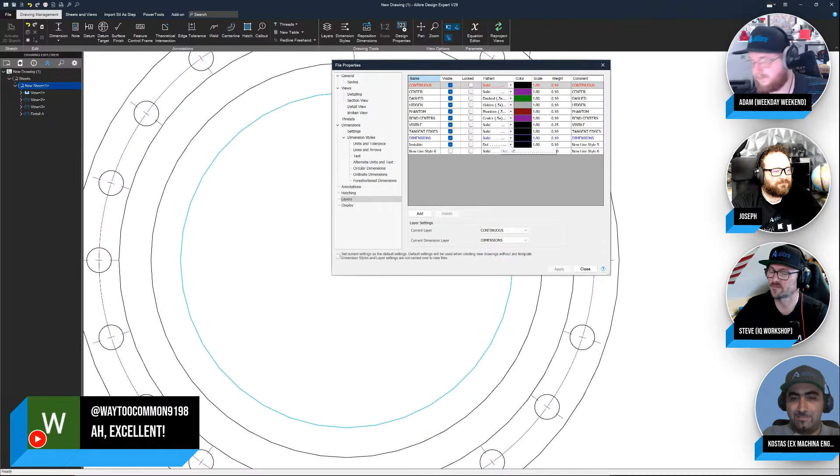So yeah, it's a CAD system that's been in the industry for a while, and it has all those features. It's not the new kid on the block. It's one of the oldest kids on the block, right? Yeah, the first ever cloud-based CAD, believe it or not.

Exactly. And then when everybody else was running towards cloud computing, Alibre is like, you know what? Maybe that's not a good idea. Yeah, now we're the own-your-software kind of platform. Which is, funnily enough, the innovative thing to do.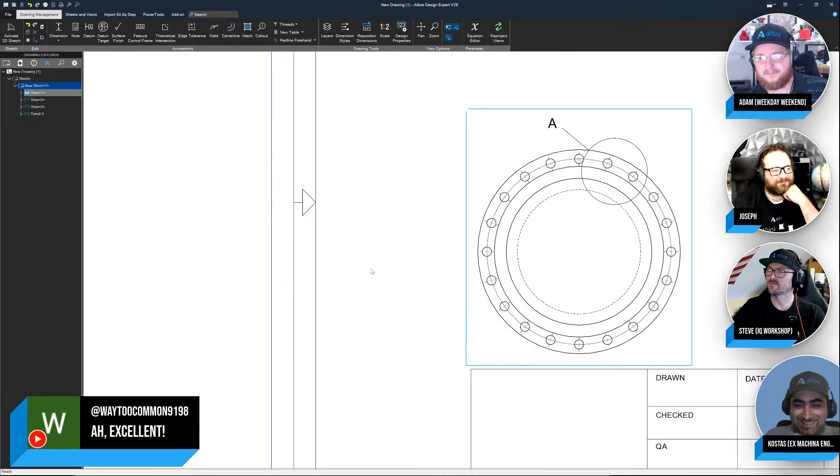Which is weird if you think about it, right? It's the whole reason most of us bought it. Well, I should say it's the first reason we all look at it, and then we go, wow, this is a fantastic CAD platform. I'm glad I did this.

Actually, I've said this story many times, but Joko did a video promoting Alibre, and I thought, well, this looks cool, and I got a trial. It was a 30-day trial, and it was like day 20 or 25 or something, and I hadn't even fired Alibre up, right? And I was working on this really important, huge project for me with a very large multinational company.

And I was using Fusion, and Fusion was getting stuck doing the webbing in an injection molded part. And I mean stuck, it didn't like it one little bit, it was driving me up the wall. And I fired up Alibre, and I did straight lines for the webbing, thin extrude, up to next, and it did it in like seconds. And I'm like, okay, maybe I should be using this. And I went ahead and bought it shortly thereafter.

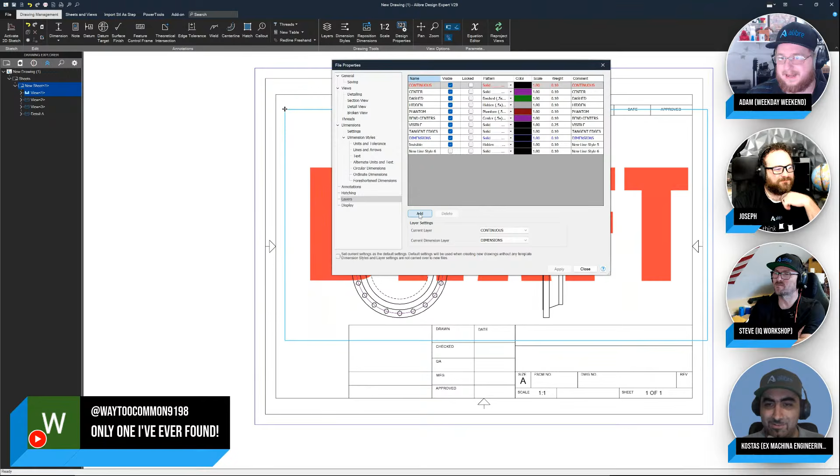Honestly, obviously everyone has the reason that they find Alibre, and again for a lot of us it was the perpetual license, but like we're saying, that is not its only claim to fame. Alibre is genuinely fantastic CAD software. Like Kostas was saying, there are things that Alibre does not struggle with that everyone else does struggle with. Yeah, and it really is.

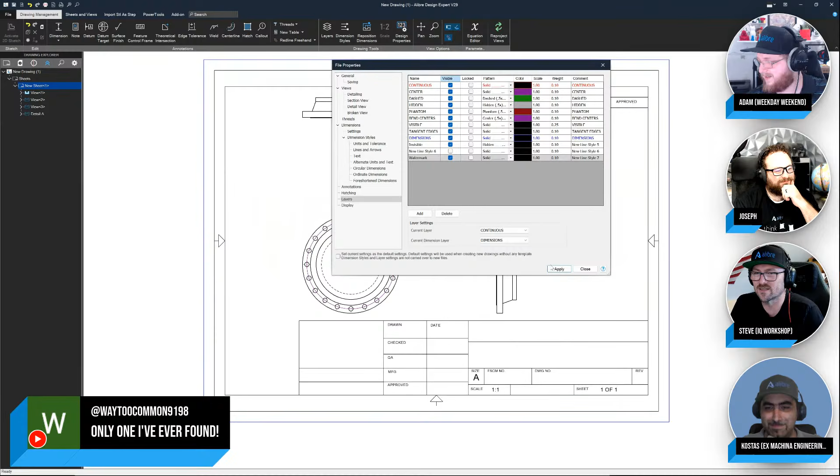I got a perpetual license for a stinky sock, right? But it doesn't mean to say I'm going to wear it. The fact that this tool is so useful is the value add.

Exactly. And I was discussing this with a colleague that I am collaborating on a few machine designs these days, and he also got an Alibre design expert. And as we were discussing it, my argument, if you will, was that okay, it's got one or two fewer tools, but you know what? The tools it has, they all work. And guys, this is not a given in the CAD industry, right?

Yeah, so yeah, sorry, go ahead. I was going to say, I still haven't seen Alibre's equivalent to the black panel of death that you see in Fusion when it starts calculating. It will not crash. Yeah, exactly.

I think I've had maybe one crash, and even then it recovered just fine. I've just reopened the file and it's all good, and you open up the recovery file. Yeah, I've had it a handful of times, maybe like 4 or 5 times. Yeah, and then the recovery file works, and I've lost like a minute and a half of my life.

But let me tell you, do you want me to tell you how many times it's happened? I've had that happen in SolidWorks. You don't. I mean, I used to use Vegas Pro as my video editor, so I know about crashes. You want to see software that crashes, just sit in Vegas Pro idle for like 5 minutes, it'll crash, don't worry.

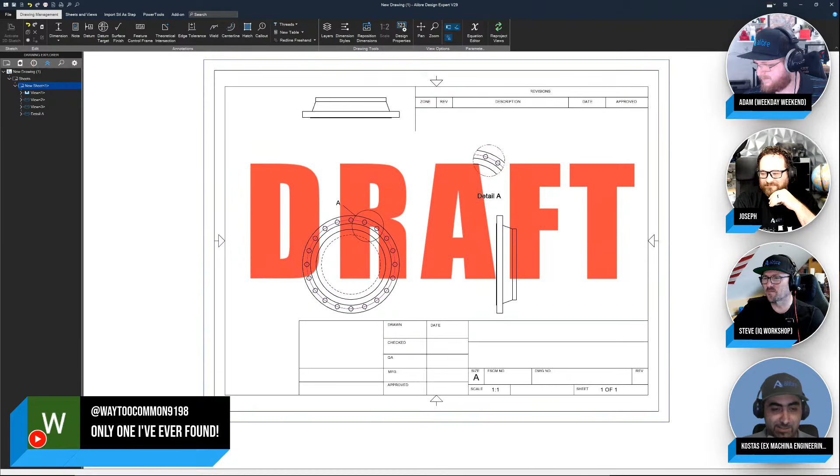So, just to mention this and balance things out a little bit, people have worked hard to make some of this software, and we're not dissing on the developers, but we are professionals, right? And our livelihood is dependent on this software. And I am not going to use something that jeopardizes or slightly risks my livelihood, and that's about it.

Yeah, my story with finding Alibre is very similar to Kostas's. I was using Onshape, and I was like, man, I would love to... I'm not making money with this now, but I would love to at some point. And then I saw some videos on Onshape canceling some accounts because YouTube videos were being made. Like, man, I don't want this to happen to me. So I literally Googled offline CAD software, one-time payment, something like that, perpetual license.

Found Alibre, got the trial, started using it, and a couple days in, got a phone call. Literally just, and obviously I didn't answer because I never answer my phone, I'll reply, I'll call you back if you leave a voicemail. And it was just, hey, this is Alibre, just making sure everything's going all right, if you have any questions let us know, if there's anything we can help you with. Just an honest call. And I feel bad because I actually didn't even call him back. I'm like, yep, okay, I'm sold. Yep, add to cart, that's it.

Yeah, and again, I found Alibre through Joko.

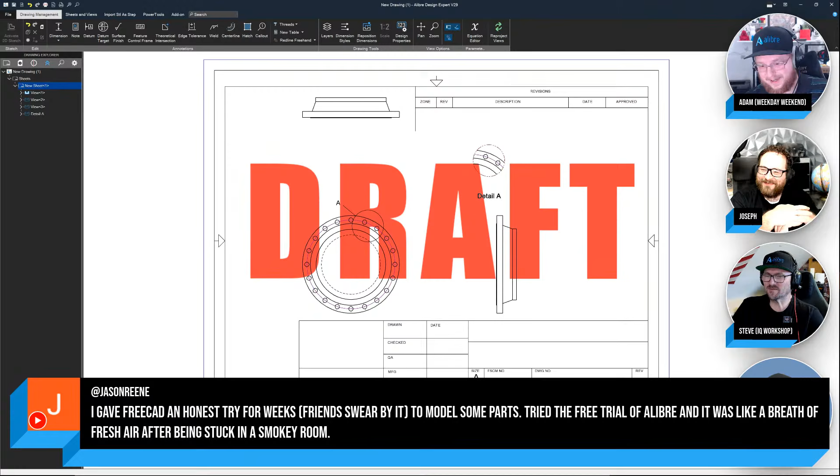One of these days, I am going to make that video, which I'm going to get so much hate commenting on. That is the main reason it's putting me off. But it'll get views.

I'm thinking about making a video of, is FreeCAD really free if you're a professional? Because it is costing you money, definitely costing you money, in time. Time is money. 1.1 has come a long way. If you're designing a single part, it's maybe okay. I still don't like it, but it's multiple times better than what it used to be.

But we were discussing tolerance stack analysis earlier and making drawings, and we're showing true spreadsheet integration where you can have VLOOKUPs and logic functions. Guys, this is what we need to perform in a professional environment. This is what the work is these days, right?

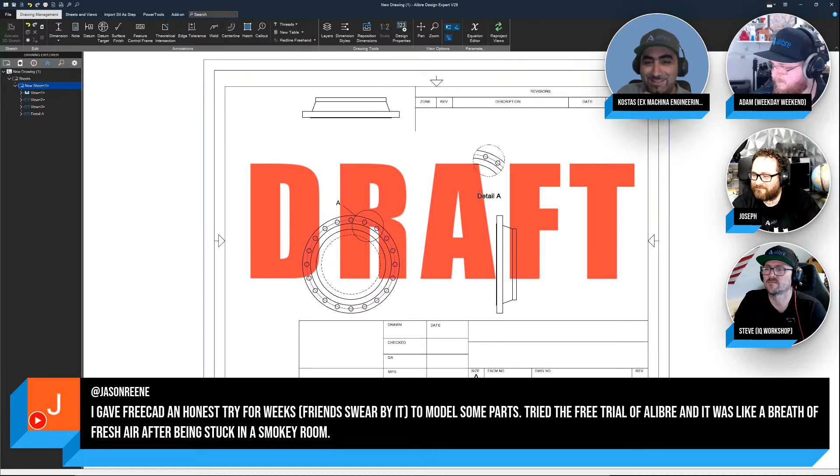And you want to hear the funny thing? Its BIM workbench is awesome. So it's better at designing buildings than designing mechanical parts. Yeah, this comment is interesting because FreeCAD really does do it all, and it's got such a big scope that it could be a big problem.

And part of that is you get people who are really good at CNC that add their CNC stuff, and then you get other people that are architects and add that stuff. And being community driven, I think it reflects a community that does a little bit of it all, and so it gets a very wide scope. And it's not even... I'm sorry. I'm so sorry, Joseph.

It's not that, right? It's that the FreeCAD community is all about building your little sand castle in the beach and defending it to death, right? No. This is the macro I built. This is the workbench I built. I built it, and you are not going to tell me how it's supposed to work, right? And that has plagued FreeCAD since its inception.

Last few years, after Real Thunder's fork, which everybody stopped using official FreeCAD and went into Real Thunder's version, which I did as well, right? After that, they started getting their act together a little bit and realizing that we need to be listening to the users. Git good is not an answer to everything, right? But there's still a lot of that mentality,

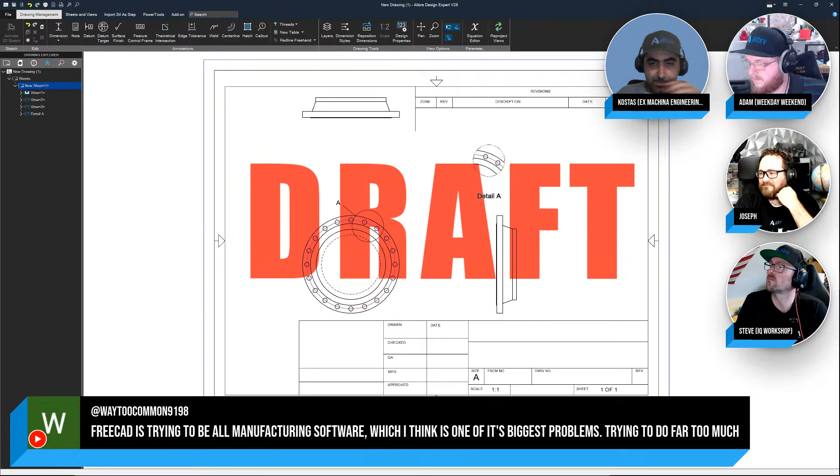and if they're not prepared to tell their contributors that this is a perfect piece of code, but it's not user friendly, so we're not going to use it. If they're not prepared to do that, they're not going anywhere, sadly. And I don't see that direction from them. And one of the beauties is, since it is free, you can fork it and fix all the problems yourself if you really wanted to.

That is true. And Real Thunder did that. And for a little while, on my transition, I needed to design a part, and I had already started my subscription for Fusion. It was a pretty simple part, single part as well. And I did that in FreeCAD, in Real Thunder's version, and it worked. And it was nice to see those fixes that were looped back into the main release of FreeCAD too. Exactly. I think that's when FreeCAD started picking up momentum.

But I think this might actually sum it up. If you go to the stats for nerds page on weekday weekend, the most used CAD software by far is FreeCAD with 211 entries. However, it does not place at all on CAD software with fastest times. However, it's also not the CAD software with slowest times. So it is definitely capable. Slowest times, is it Siemens? It is Fusion 360 right now. Siemens NX is actually number 2 with the fastest times.

But what about Solid Edge? NX is pretty up there. By the way, NX is hugely expensive, right? I mean, do not consider NX if you're not like a 100 employee company, $1 million yearly cycle or whatnot. It doesn't make sense. Yeah, I'd love to know what this other is, because number 3 is just listed as other, so I'm not quite sure what.